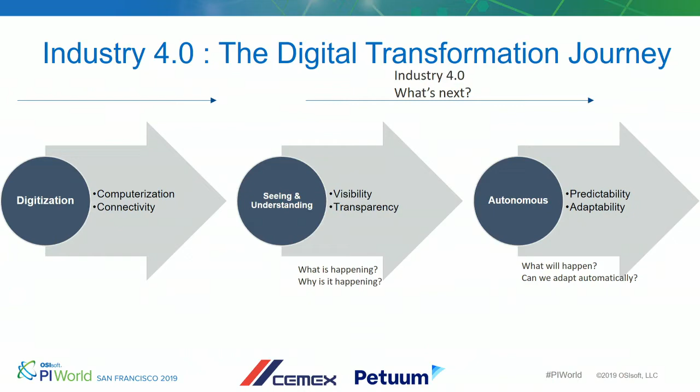And when we started with Petuum, it was, okay, I have some understanding, but I want to see if this technology can serve me. We had already started doing some linear modeling on the advanced analytics side, and even though we got good results, that was not quite what we were expecting, so we wanted to take it to the next level and see if machine learning could do that for us. After we did that, we went all the way to the next step, which was to get an autonomous operation. And that's where Petuum's process came in really good.

So, in summary, and this is just a very brief introduction, the first step was to get connected, then to get prescriptive understanding and recommendations on how to operate, and finalize with autonomous operations.

So why artificial intelligence? Why did we want to move from advanced analytics to artificial intelligence? We really believe, and there's a lot of literature around this, that artificial intelligence is the key to future growth and success. And either you get on board, okay.

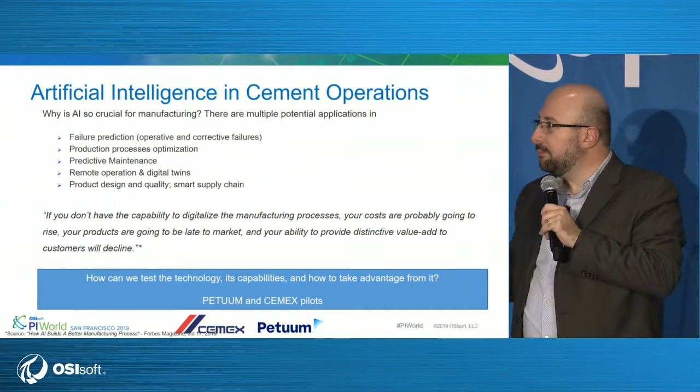So yesterday we were listening to Mark Jeffries saying we need to have a vision, and everybody tells you the vision and not the journey. This talk is about the journey, but I need to tell you the vision. We set a goal four years ahead of time: we wanted a fully autonomous cement kiln by 2022. Hopefully, we will achieve that sooner, but in the end, we want to achieve a point where we have operations empowered by AI.

So it's that the people will be able to do their job better, more efficiently, being empowered by artificial intelligence. This will allow us to achieve increased efficiencies, reduced fuel consumption, better quality, reduced cost, and obviously better reliability on our equipment.

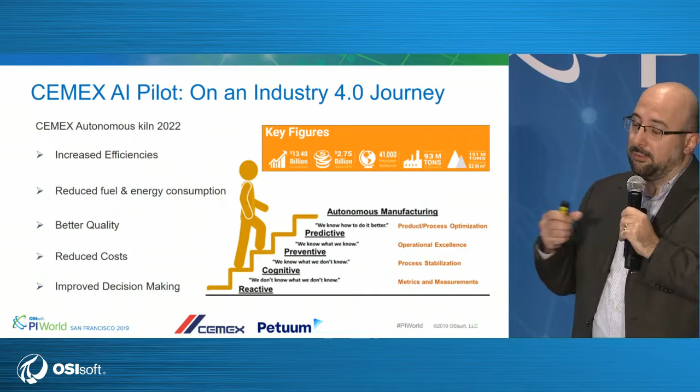And this takes us to the start of this journey a year ago. It started here in PI World last year, where CEMEX and Petuum met. So it has been a long journey now, a very good experience working with Petuum. We started engaging with them, analyzing our data. We knew what the vision was, where we wanted to get, but we didn't have the exact idea on how to travel that path.

So we started with number one, what we had already done with linear modeling, and that was prediction. So we said we want to have real-time prediction using machine learning. Let's see if this does what we have already done, and if it does it better. So we wanted to test the technology. Then after we had that, we went to the second stage. This was a phased approach.

The second phase, which evolved as time passed, was to get the prescriptions. If we already had a forecast of how the process was going to behave, instead of having the operator make the decisions, suggest improvements to the operator. And in the third stage, if we already have a prescription or a recommendation, take it to the next level and feed it directly to the kiln.

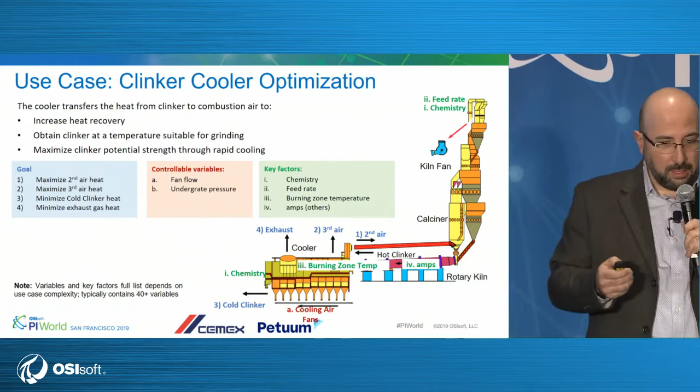So going into how we achieved that, in the first phase, and that was the very first test, it was, okay, help me with the prediction on how the material or the system is behaving. So we were able to identify the output variables behavior very well, I would say, between 5 and 15 minutes; up to 25 minutes, you're still okay. Beyond 25 minutes, then it starts diverging.

But the very interesting part of it was that we were able not only to predict ahead of time the temperature with a very small error, but also the changes in slope. And to us, this was impressive. Getting this information even 5 to 10 minutes ahead of time to the kiln operator makes a huge difference, because now they know what to expect and how to prepare for this. Right now, it used to be only reactive after the fact, but having this ahead of time makes a huge difference.

So when we first saw this, we said, wow, this is something beyond what we ever had. So we asked Petuum and the team. And I need to say the team because it's Petuum, it's a CEMEX team. We have our subject matter experts, our data scientists from Petuum. It's a big team working on this. It's not a minor effort.

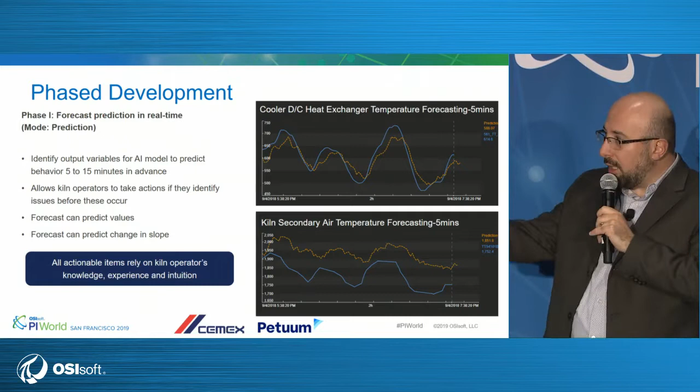So the request to Petuum is, now you have given me the forecast, can you help me with some recommendations on how to operate? What actions are the ones that the operation needs to make in the system? So we moved on to the second phase, which was give me the prescriptive recommendations.

Just as when you go to a doctor and they tell you, okay, take this medicine and it will help you get better. This is exactly the same. We have recommendations, and it's up to the patient to decide to take it or not. So we cannot force them onto the kiln operator, but at least they are supporting the operation. The way we started doing this is they had some recommendations, and it was up to them to feed them into the system.

And they were given new recommendations every 5 minutes. So if you are receiving 10 different set points, and then you start comparing, I have a set point of 10. Is it good enough or not? Is it reasonable? Is it too high, too low? So by the time the kiln operator decided to input or to validate if that was a good recommendation or not, it took more than the 5 minutes that the system was feeding them.

So we started with 5 minutes manual recommendations, and we said, okay, this isn't working. First of all, we need a better way to validate if the recommendations are sound. So we added some screens to determine if the recommendations were sound or not. So we have a box plot to say, okay, this is the way you've been operating, and this is within range or not. So after that, it was, well, not really easy, but easier for the operator to say, this is a sound recommendation and I will put it into the system. And then they had to type everything manually.

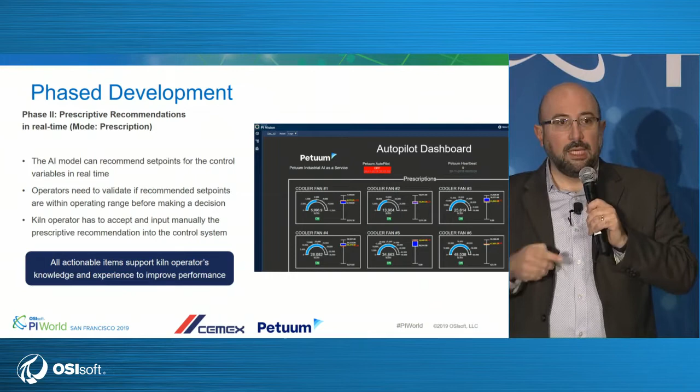So that led us to the third stage, which was, if you have already solved the hard part, let's connect it to the system, feed it directly to the system. That's the easy part, because you solved all the hard work before. So the third part is to connect it directly to the system. So we have now a way in the control system to have an auto steer on, just like the one you have in your cars, that you are driving at 50 miles an hour, and you say, okay, I want cruise control, turn it on, and then you forget about it. So this is really good.

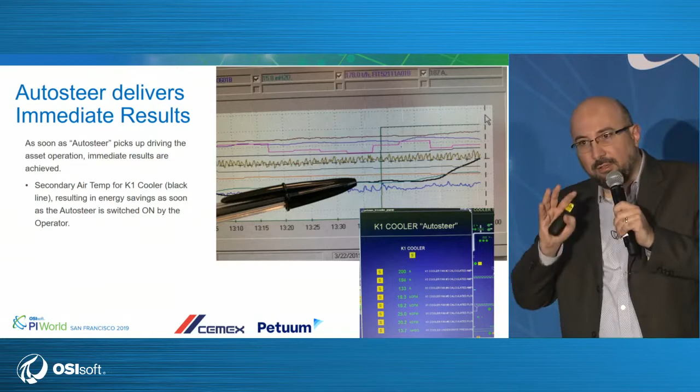I mean, this is really exciting, and I don't know if I can portray my excitement well enough. This is like when you were a child, remember when you learned to ride a bike. The first time you rode a bike without any help, you had that adrenaline rush. This is the same. When you have an AI model running the system for you, first time ever, it's something out of this world, and that's the feeling that we had, really.

So our achievements. In phase one, we were able to forecast predictions in real time. Phase two, we were able to achieve prescriptive recommendations in real time. And in phase three, we were able to successfully have auto-steer operations in a cement kiln. And I marked the date here. Internally, we've been using this slide in CEMEX since November 27 of last year, because that was the first day we achieved this. So to us, it was a historic date because we are changing the way we operate, and that's the beginning of a journey. A very amazing and exciting journey.

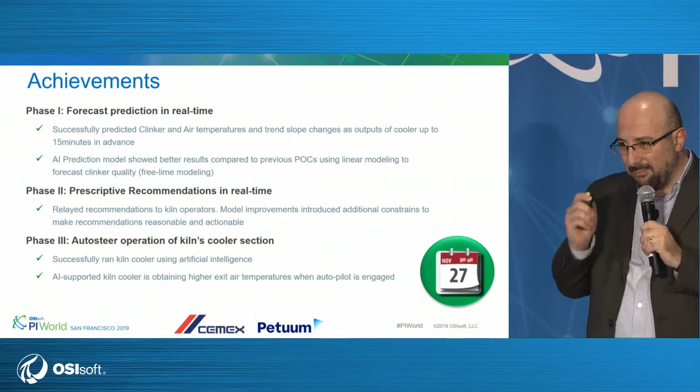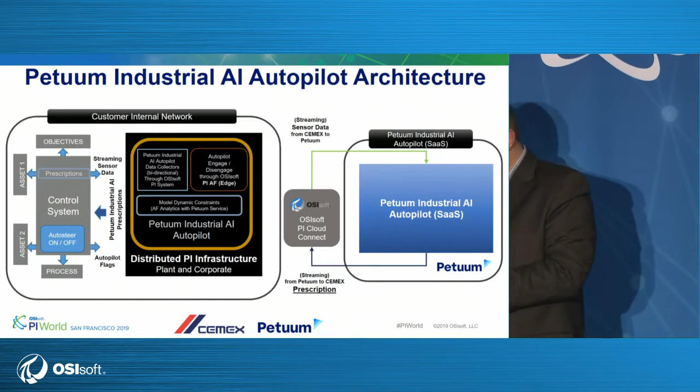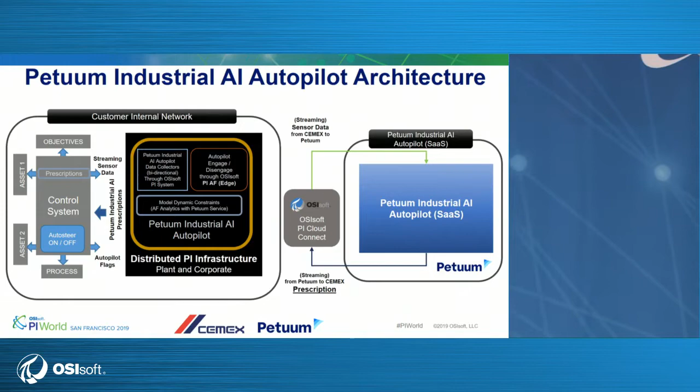So to tell you how this works, I'm gonna hand off the mic to Prabal, who has all the technical knowledge on this. Can you hear me here? Okay, I'm good. Thank you, Rodrigo. This is great. Can you hear me okay?

So it has been a great day, that November 27. We had been working for quite some months before that. Together we'll show you quickly what we're doing here, but tomorrow we also have a session where we can go deeper into the Petuum Industrial AI Autopilot. So from left to right, the control system: we actually use OSIsoft PI infrastructure for bidirectional connectivity. We're using OPC. I'll go into a different slide.

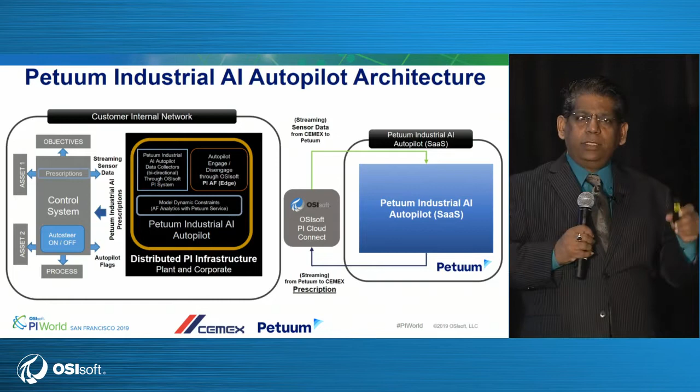But what's interesting is that all the three modes that he was talking about, the forecasting or predict mode, then the prescribe mode and the auto steer, all run through this entire end-to-end system. The industrialization of AI has already happened. And so if I go into the next slide, you'll actually see what we do. So we are Petuum. We're an AI platform company. We're coming from a great set of co-founders.

We're coming in from Carnegie Mellon. Our co-founders, Eric Xing and Qirong Ho, are both here. We're headquartered in Pittsburgh, and we also have an office here in Silicon Valley.

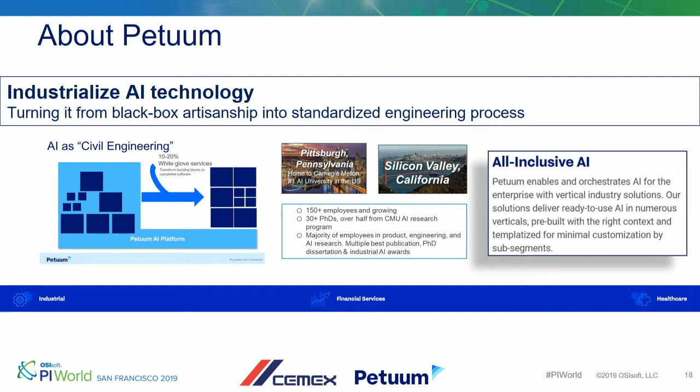So AI as civil engineering. I don't know whether you actually heard this. We have moved from AI being just an artisanship, somebody just doing a great AI model, a great ML model, and putting it in production. Those days are actually past.

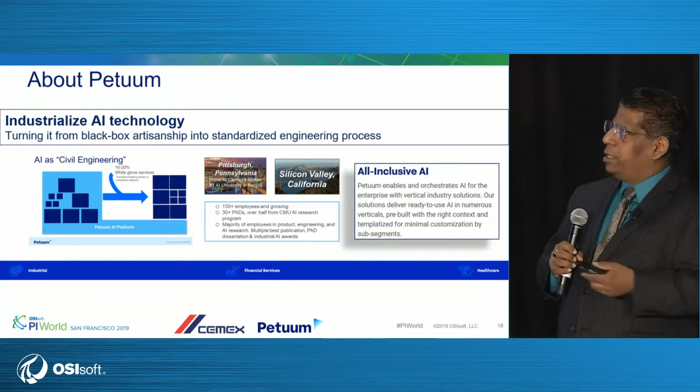So now, working with CEMEX, which we are showing here, you can actually deploy this autopilot, auto steer, at scale across your enterprise, not just for one asset, not one cooler, but across 57 plants, 75 lines, with the pyro process, the ball mills, vertical mills, all the things we are working on together. And how are we able to achieve that? Through our platform, the Petuum AI platform, and I'll go into a little more detail after that.

So as the Petuum Industrial AI Autopilot, in this slide, you will see from left to right, first is the customer network. We know here you all have the PI System, or you're deploying it, or you're thinking about it. In CEMEX's case, they already had it, so that helped us a lot. Immediately from there, we took the time series data, but we also connected to some of the unstructured and structured databases. We've been working with some of the images, some of the videos.

All those things are captured and come to our Symphony AI platform. That's where all the data aggregation happens. That's where the autopilot products, or the modules, are built. So the cooler he has been talking about is actually an asset autopilot for us. And if I take the cooler, preheater, and the kiln, then it becomes a pyro process. That's what the process autopilot is about.

And then we have some operational excellence initiatives. I'll go into more detail tomorrow, and also come and talk to us. I won't steal the thunder. But one of the things I want to say in this slide is that when you are deploying at scale, you need a lot of these enterprise processes.

For example, self-learning. We deployed the cooler autopilot on November 27 in one of the plants, and I can see Edmo right here working with his team. But today, here in April, it's still running every day. They are switching it on. But the data has changed. A lot of sensors have changed. That self-learning is very, very important.

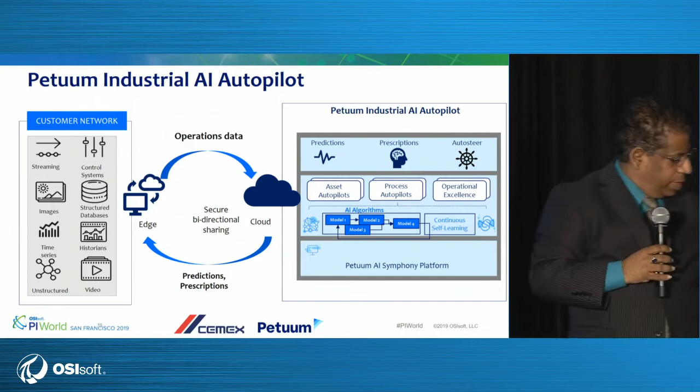And finally, this is how it looks from our side. Again, this is a drawing, not the exact thing. But remember the slide he was showing about the cooler and the kiln? This is inside the system. We have some controls, some objectives and constraints, and look at the data flows from PI, and in this case, there was an unstructured database, and the 3 modes.

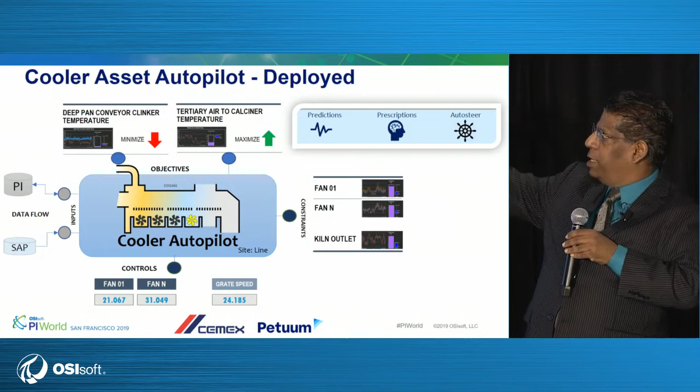Let me tell you a couple of things about the OSIsoft integration. Very seamless integration. We started from the very first day. The enterprise infrastructure was already in place. We didn't have to spend any time on the data collection part. We use Pi Web API. We use the connectors. For bidirectional connectivity, they had to deploy the Pi OPC read-write, but that was, again, seamless, as part of our edge, which is the auto steer part.

By the way, about auto steer, I want to explain a couple of things. Of the 3 phases we talked about, don't think that auto steer means it's actually doing the steering. It's more like guide rails. The operator is still there, in a supervisory mode. He can run everything that he wants. He can even take a portion.

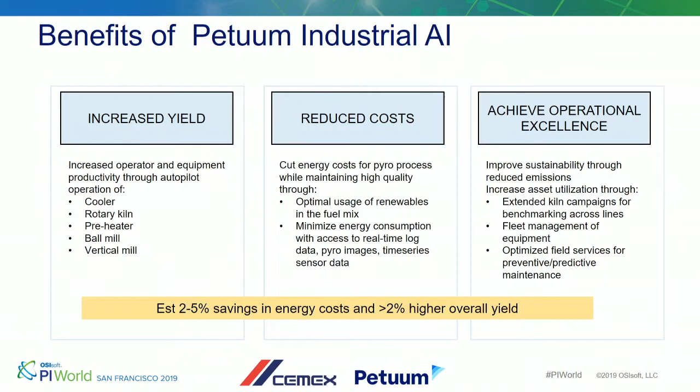If you looked at the autopilot screen he had, you'll see that he can switch on some of the fans and make Petuum run them, and some of the fans he will control. So all those things are there. We use the asset framework and the asset analytics part of that, and then the Pi Vision custom controls. Finally, we are working with OSIsoft on the OCS integration. I'll skip this one. Benefits of industrial AI, you have already heard, but due to time, why don't we come in here?

Well, we're running out of time, so I'll try to go fast here. Oh, okay, good.

So, going into the main challenge, the solution and the results: the main challenge was that we wanted predictable, repeatable, golden day of operations, obtaining high yield, high quality, low cost, and sustainable. To prove if the artificial intelligence or machine learning capabilities to optimize our process were still too academic or something that could be applied successfully to our operations.

The process is a very complex process. We have a lot of variables in there. And the complexity is that even the weather, material chemistry, and something that happens way before the material arrives to the system can have a big impact. So we have a lot of complexity in there. And up to that date, we didn't have any real-time predictions. And even the very first efforts we had were not good enough. So we wanted something better.

The solution was by far Petuum Industrial AI. It taps into the PI System and other sources to deliver not only the forecast and the prescriptions, but, as you saw, it can now also operate one of the sections of the kiln.

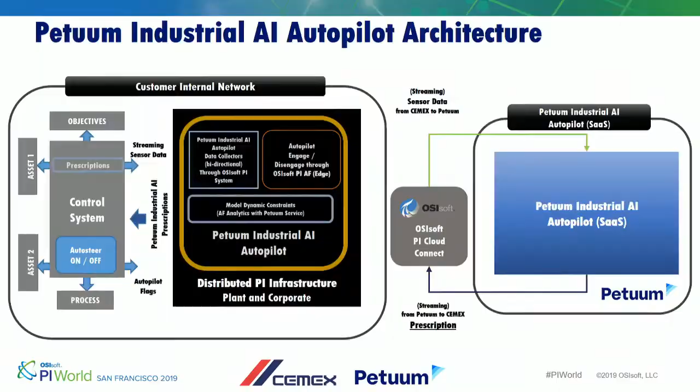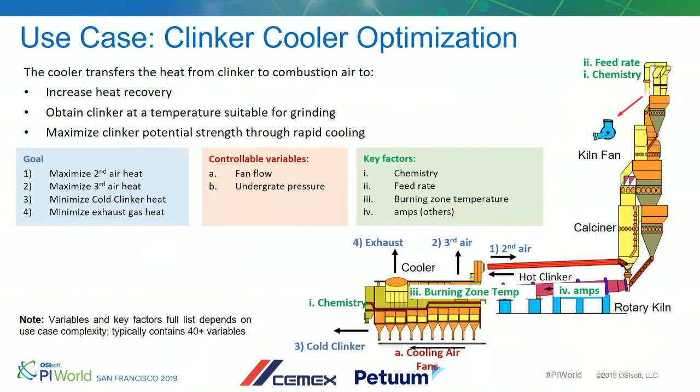Yeah, let me go real quick to the schematic. The very first test that we did was the cooler section. We are working now on developing additional models. We already have a second model working here, and we are deploying a model for kiln power stabilization. Then we have another model that takes the whole preheater tower process to avoid blockages and to provide process stability. After these three, and everything is interconnected, there is a fourth use case that has to do with fuel optimization.

The fuel mix optimization takes into account three main axes. One is production yield. A second one is the alternative fuel usage. And these objectives can sometimes conflict with one another. Sometimes it's a business directive to maximize yield because you're in a sold-out market. Sometimes it's on alternative fuel usage because of strategic reasons. And then the third one is fuel cost.

So you have to take into account, as you start putting more variables into it, it becomes more and more complex. And sometimes if you want to add more alternative fuels, then it will have a huge impact on how the system operates. So you have to take all of those into account. That's why we're putting that in the longer term after we do all of this, because these are, I would say, prerequisites for the other one.

Thank you. So we cannot copy anything of lime kiln fuel optimization from your part? Well, I would say not copy, but no, it is not as easy. The methodology is there. Even within CEMEX, even though we have the exact same kilns installed in different countries, they behave completely different, simply because of the material mix, fuel mix, and everything. Yeah, thank you.